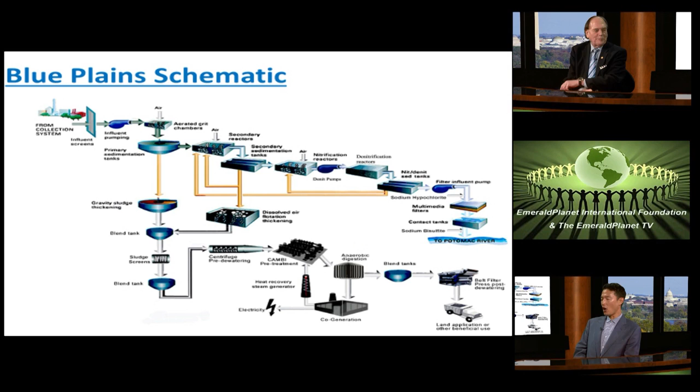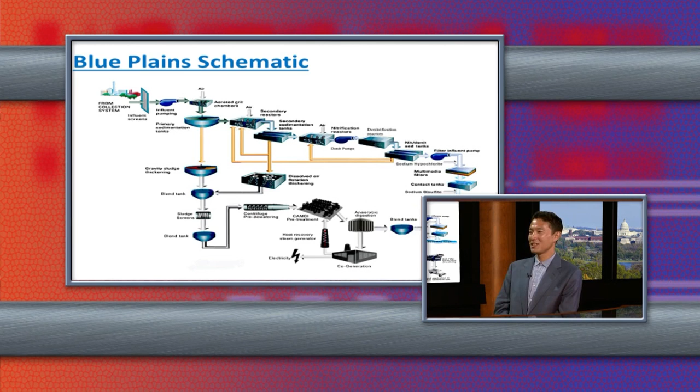If you take some muddy, murky water and put it into a bowl and just let it sit there for two hours, what's going to happen? It's all going to settle. That's all it is, it's a simple physical process.

We've been doing this primary treatment since the 30s. Whatever settles, we pump out the solids into solids processing, where the clear liquid overflows into the next process, and after that the biological treatment starts.

This is something our viewers will find interesting, because you've gone now from the mechanical to the biological process, where the aerobic and anaerobic bacteria now starts to do its work, correct? Yep, exactly.

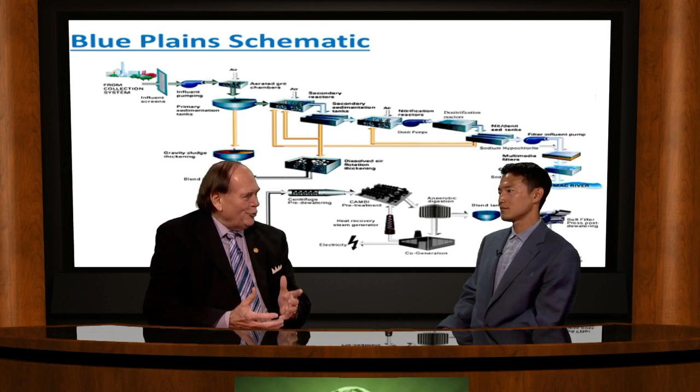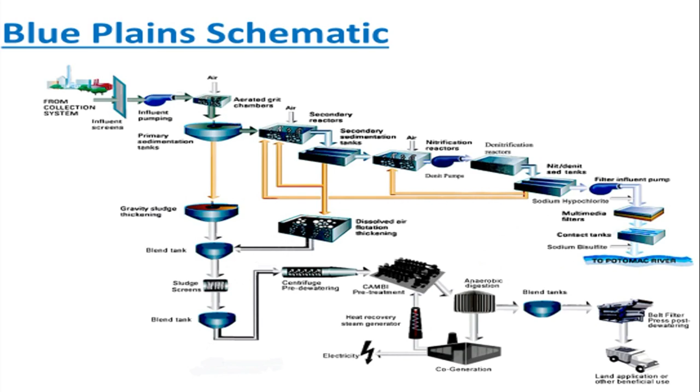It's way more cost effective to let the microbes, the tiny little microorganisms, do the work for us. There's trillions of them, and people have no idea - it's just a whole diverse ecosystem doing the work for us.

This is really a beautiful layout, and some of the new improvements you're doing since you've been there. So what are we seeing here in these colors - the blue, the green, yellow, and the pink?

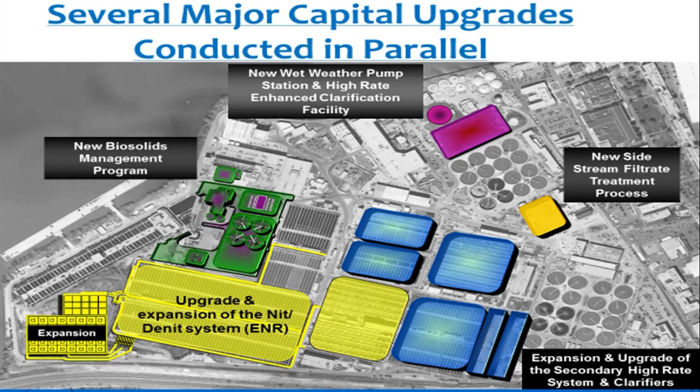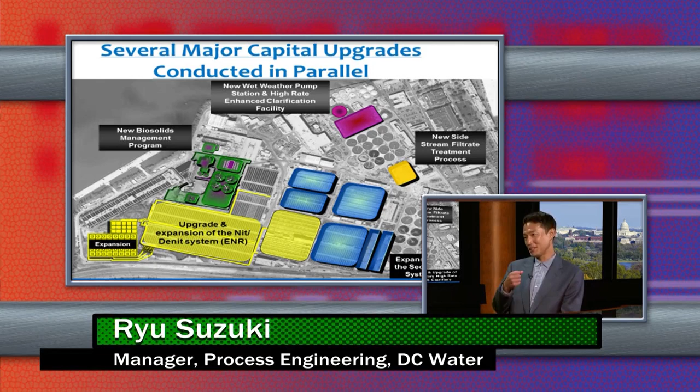The blue is the expansion of the secondary treatment, the biological system, where we add a lot of air and grow these beneficial bacteria that munch away at what we flush down the toilet. These bacteria are kind of like you and I - the three things they need are food, which is what we flush down the toilet, air, which we use a lot of energy to provide through these big blowers, and plenty of water. It's just providing more space and more upgraded equipment for them to do their work.

And then green and yellow? The yellow is the nutrient removal, which is also in order to comply with this very stringent limit that we have to expand our existing facility for.

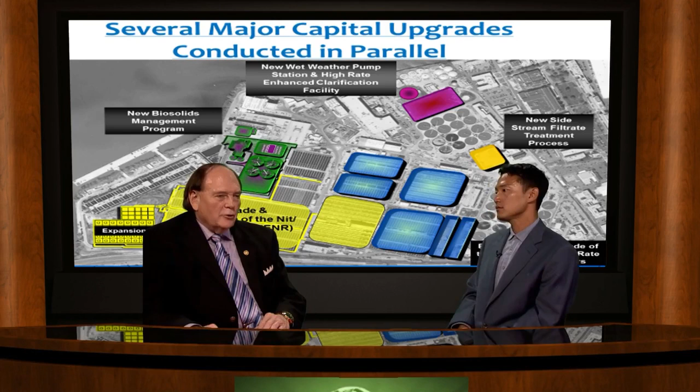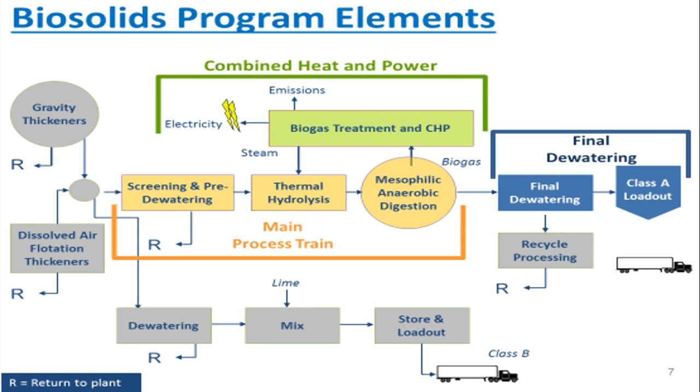And then the green - we'll talk about the biosolids later, but I know this is really your pride and joy, taking care of all this and turning it into useful products for DC Water itself, not just sending it out to the countryside but actually turning this into electricity, which is something we really want to spend time on. Yeah, absolutely, because that's very important.

If you're an engineer, this is all beautiful, these tanks and all that. So tell us about what we're seeing here. This is the thermal hydrolysis process, currently in the construction phase. This was part of the $400 million biosolids program that we completed a couple years ago.

We're going to get to all this later on, this hydrolysis. But looking at this, what do you see DC Water being in the next 5, 10, or 15 years as far as improving its processes and giving even better service to its ratepayers?

I think the biggest thing we're pushing for is because of some of the things you'll hear about later with the Clean Rivers Project, with the big tunnels - we've invested a tremendous amount of resource into it. So now, because the ratepayers are getting hit hard, we have to figure out how to optimize and make our entire organization more efficient.

When you look at this technology, it's just absolutely incredible, and we're going to get to that in just a little bit. This is Ryu Suzuki, professional engineer, manager of process engineering at DC Water. Water is life. Thank you for being with us as we create the Emerald Planet.

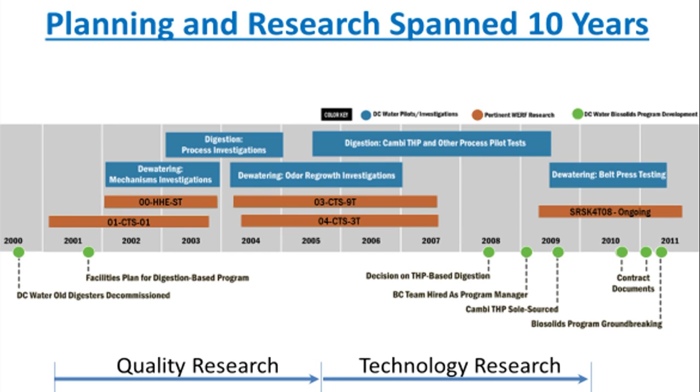And also, so you got the long-term cost as well as just to be able to create this good product. But don't the regulators have something to do with this? Isn't that really one of the principal drivers, to make sure the water is coming out the cleanest possible? On the liquid side, yes, we've put in enormous investment to clean the water itself, but the byproduct is the solids. And that was actually not driven by regulation.

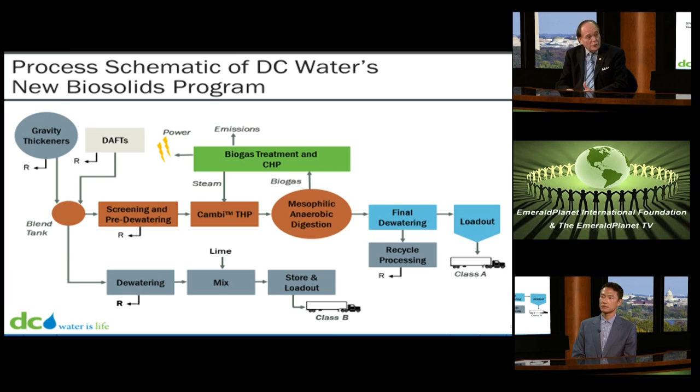That was all more based on looking at the long-term operational sustainability of DC Water. And that's really important - sustainability, resiliency, and also innovation, because you really scoured the whole world as far as finding the best technologies. So where did you actually get this particular technology that you brought into DC Water?

And now it's an incredible process. Yeah, so actually this thermal hydrolysis, it's been going on in Europe for some time. The company is originally from Norway. This particular system that we bought - now many other companies are getting into offering a similar product as well.

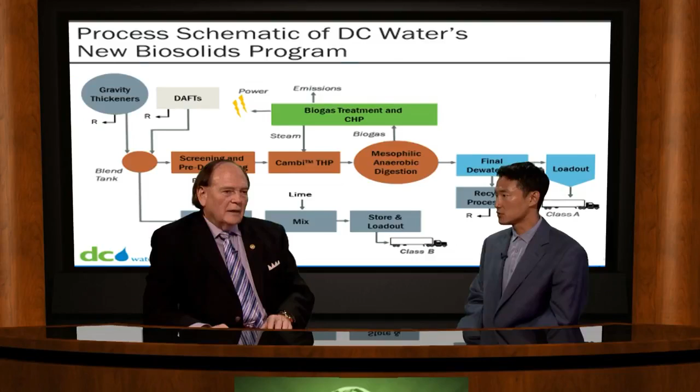So they've been doing it in Europe, and it seemed like the appropriate fit for DC Water as well. An appropriate fit we're looking at now. This is in large part because it took over a lot of extra space out of your footprint out there. But tell us what we're looking at in this green and purple space.

Yeah, so this is most of the solids treatment process that we're going to be talking about in a bit. What we do is we take this tremendous amount of organic material and convert it into clean biosolids as well as renewable energy.

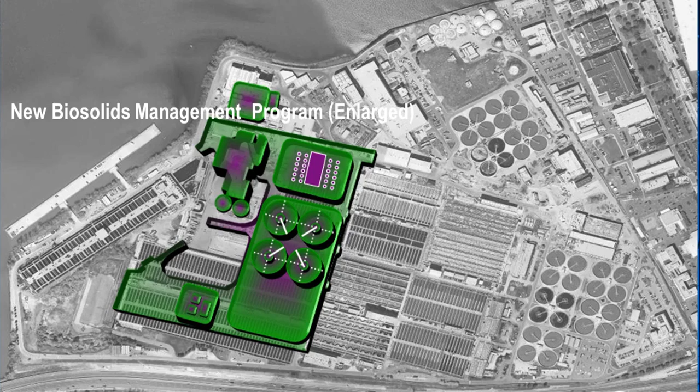And the whole thing about this is taking that - this is a waste. You've been shipping it, it's got to go by trucks. You're trying to find land out in the countryside where it can go, but stay away from estuaries, the creeks and the ponds and the rivers and all that. It seems like you've really come up with an excellent solution because you're producing all this right there and you use it right there and you turn it into a kilowatt.

Well, that too. But originally, one of the biggest advantages of having an anaerobic digestion system is before, what we did was all the solids that we added lime to it, raised the pH up to 12 to get this Class B. And we had to truck out about 60 trucks every day. So that was close to $19 million a year.

And the whole thing about it, just think about the amount of greenhouse gas emissions from all those trucks running on the highways. We certainly have enough cars and traffic on the highways around Washington, D.C. We don't need more, we need less.

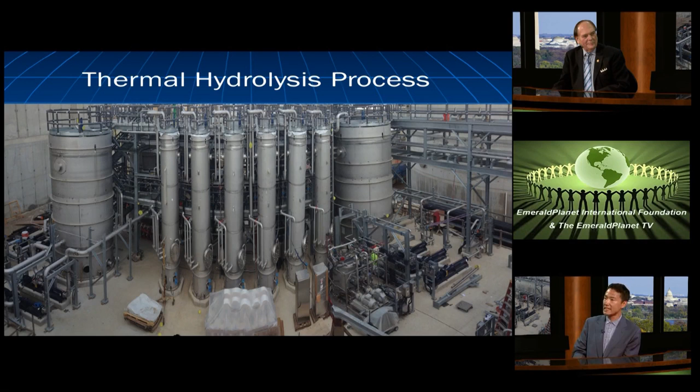Yeah, absolutely. But with this new thermal hydrolysis / anaerobic digestion, we're converting half that solids into biogas, which is a combination of methane and carbon dioxide. And it goes into another combined heat and power facility where it gets converted into electricity and heat to drive the thermal hydrolysis process, which is the steam. And pressure cook the sludge.

Yeah, and this is really very efficient what you're doing, and I find this absolutely amazing that maybe we waited so long to do this, but I guess the Europeans perfected this, particularly the Norwegians, and then we decided well, this is something we need to really try here. Was that part of that process?

Yeah, absolutely. And once again, you talked about how there's limited real estate in our facility. So we needed to be able to have a facility that could do all this treatment for us in a very small footprint. And that's what thermal hydrolysis allows us to do.

And this is some of the equipment you're using for this. What's this main process train? You and I were talking about this earlier. This is a beautiful layout. I like the color scheme and the scale and all that. But tell us, what does this really mean?

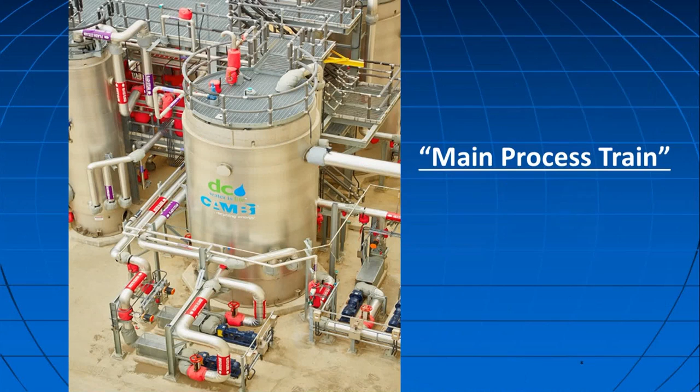So the main process train is basically the main process train of the solids processing. And what it is, it not only includes the thermal hydrolysis and anaerobic digestion, but all the other auxiliary systems that we need to be able to make this system work.

Now we have this here. This is a beautiful looking piece of equipment. Of course, if you like engineering and technology, this is beautiful. Other people would say something different. But the process of this, what would have been there before? Would it have been nothing, or would it have been much simpler and much less complex than what we're looking at right now?

So just for the people looking at this, how have we morphed, we've gone to the next level as far as processing? Anaerobic digestion, if you could think of it, is this massive cow stomach that takes organic material and stabilizes the solids and converts it into biogas.

But say if you have raw food, which is raw solids, it takes a lot of space to be able to break it down fully, to get the full reduction of solids and let the biology do the work. But if you could imagine, going back to the bean, if you have the cooked beans, it takes way less stomach volume to do the same amount of treatment, because it becomes way more biodegradable by cooking this material.

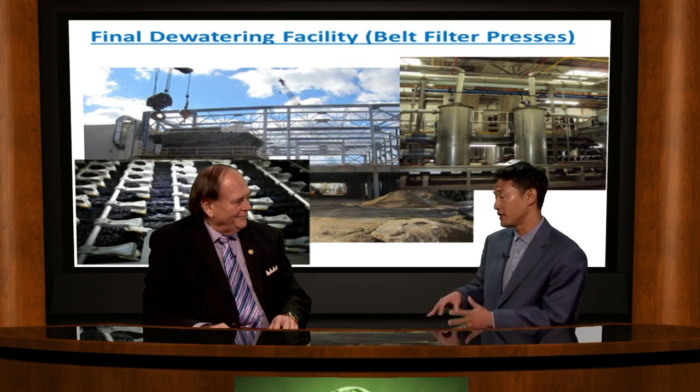And plus, another major advantage is because we're cooking it at such a high pressure and temperature, you're sterilizing the solids. These solids do have a lot of pathogens in them, but at this high temperature, high pressure, you're just annihilating it all. You're sterilizing and killing all that off.

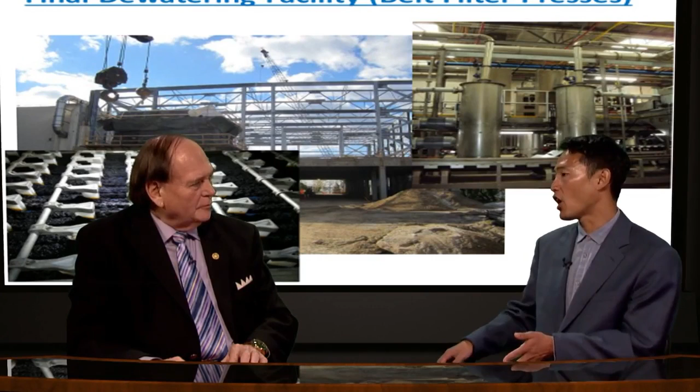Now, dewatering, why is that so important? We still have to haul out the material from our site to different gardens and farms for land application. You want it to be as dry as possible because the more water you have, water is very heavy. Also, those solids are easier to get into the streams, ponds, and surface water if it's really wet versus being dry and spread across the top of the soil.

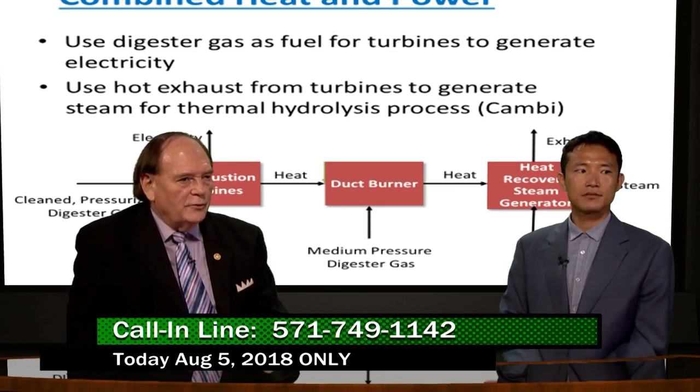Combined heat and power, this is something you referred to briefly before, but it's something that's really new. So tell us why this is so important as far as DC Water is concerned, but also the ratepayers and the environment, because that's the ultimate goal. How does this really help?

So in the digestion process, we generate all this biogas that has about 65% methane, or natural gas. First we clean it up, then compress it to a very high pressure, and then combust it through combustion turbines to generate electricity. We're the largest energy user in all of DC area, and this meets about a third of our energy need, which is enough electricity to power about 8,000 homes typically.

8,000 homes, yeah, all from what we flush down the toilet. Oh my gosh. There's a lot of energy value in it. Yeah, absolutely, and that's what we're using it for. This is really just a schematic, similar to what we were looking at earlier as far as the layout of this whole facility.

Looking at the future, what do you see as far as this thermal hydrolysis process and where we're going over the next 5, 10, or 15 years? Do we go from a third to half, two-thirds, three-quarters? Are you going to generate your own electricity and steam, or what do you see realistically for the future?

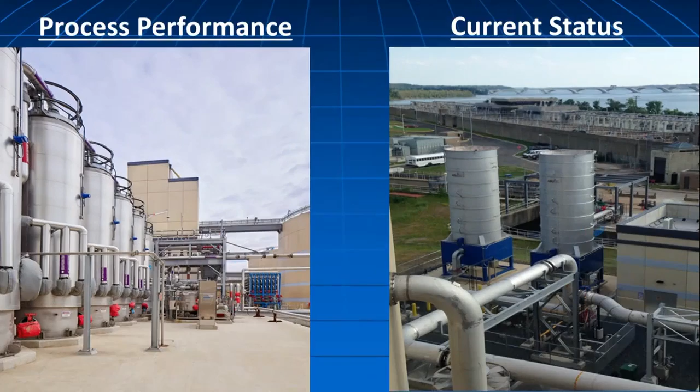For the near future, I think at least mine and our team's main goal is to really maintain and optimize the system, because there's a lot of moving parts, and our ratepayers have made a tremendous amount of investment. So it's our duty to make sure this system is sustainable and we're able to keep running it. Process performance, current status, all of this is to make it that much better. And then if you can expand it gradually over time, you want to do that, but for now our main focus is to maintain what we have.

That's fantastic. Ryu Suzuki, professional engineer, manager of process engineering, DC Water, Water is Life. This is just incredible to take this tour through, we'll call it a campus. It's a beautiful location, it's a beautiful site. Thank you as we create the Emerald Planet.

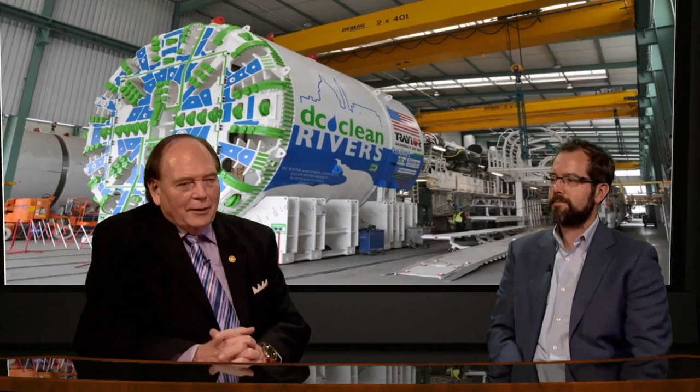But this looks very innocuous. It's just sitting there. But this thing is a monster that we're looking at right now. Now we're moving into this big dig, right? I love to call this, and I've heard that. I don't think it's original to me. But tell us about the big dig and what are we actually looking at in the size of this thing?

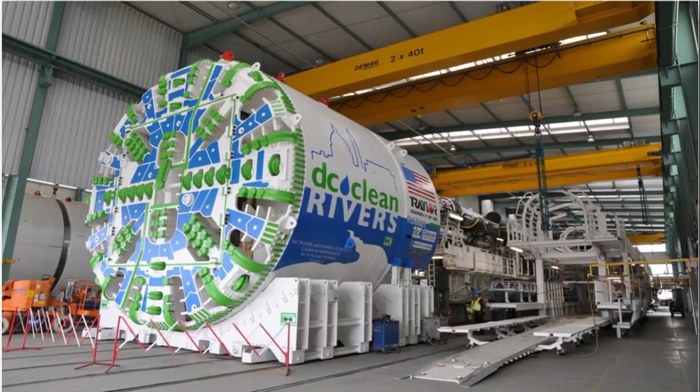Absolutely. So we're looking at one of our tunnel boring machines. This is one of the machines cutting the tunnels we're constructing underneath the district as we speak. We're building 18 miles of deep tunnels to intercept combined sewer overflow and capture that flow and keep it out of our waterways. The tunnel boring machine is typically about 450 feet long. They're assembled or constructed in Germany and then shipped over. At least this machine was built in Germany and shipped over in about 17 pieces. It cuts a 23-foot diameter tunnel.

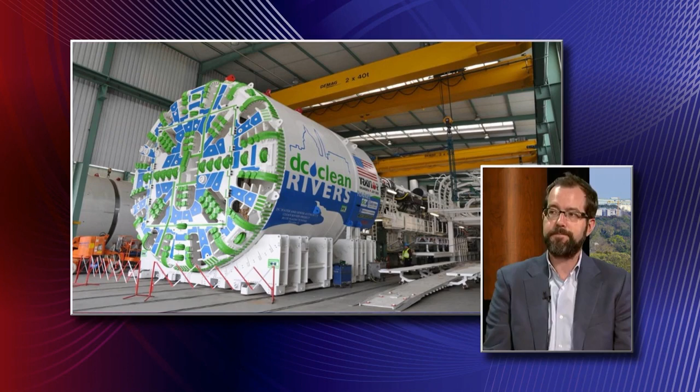That's so incredible. It's a massive, that's hard massive to machine. Yeah. And you look at this, and it's not that overwhelming as far as looking at it, but something that can cut 23 feet, I mean, that's huge. I can tell you, as someone who's been down in the tunnel, or also someone who stood in front of the cutter head of these machines, it is absolutely staggering, just the enormity of the machine itself.

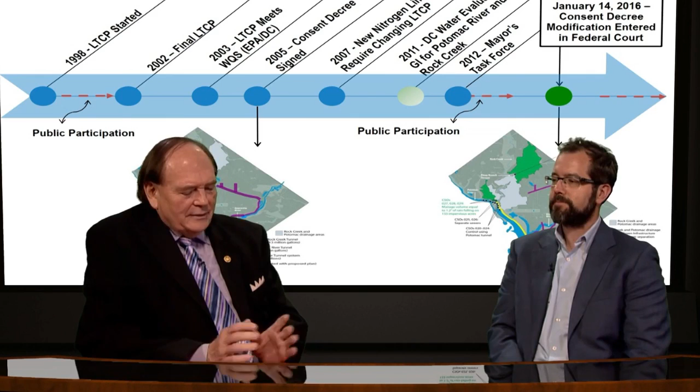It's really just massive. Now, looking at this, there's a lot of regulations involved in this. We wanted to improve the rivers here, but again, going to the Chesapeake Bay, out to the Atlantic Ocean.

I mean, there's a lot of people that are very concerned about the water coming into and then going out of Washington, D.C. in this whole region. But it's a long timeline. If you look at the number of years involved in this, it's incredible.

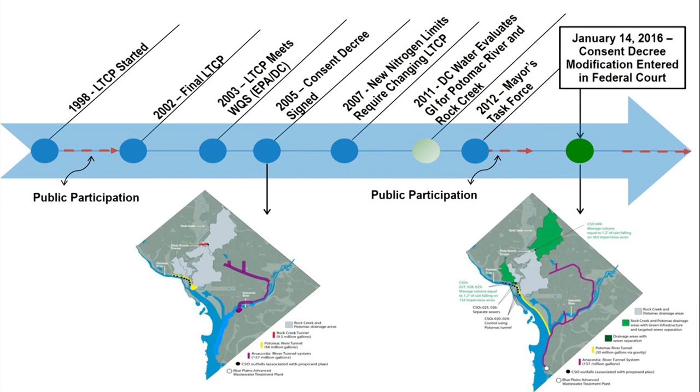That's right. So we've been working on this project really since the late 90s. Basically, the district and DC Water were found to be not compliant with water standards because of combined sewer overflows going into the creeks and rivers. So by 2005, there was a consent decree and a long-term control plan, which is basically the mechanism for meeting water quality standards. And the way we're doing that is through these deep tunnels, as well as green infrastructure, which we'll talk about a little bit more later.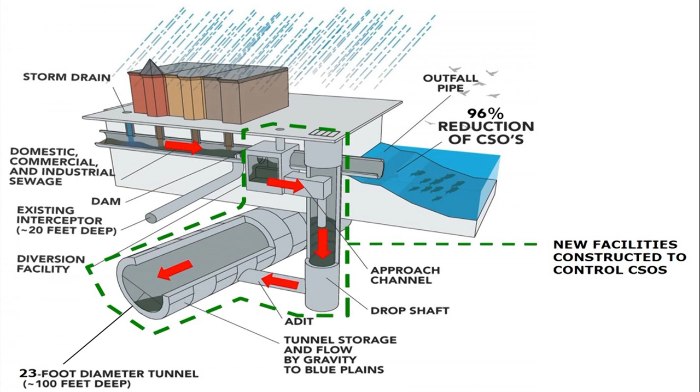Yeah, and we have the schematic. Just tell us what we're actually looking at here and why this is so different, maybe even radical from what was going on before. So in the schematic, you can see the old sewer system and the old outfall that goes right into the river. It's showing a combined sewer. The middle third of the district is actually a combined sewer system, so it's one pipe for both the sanitary flow and stormwater flow coming off the streets. Which is very inefficient. It was actually high tech about 120, 125 years ago, but now no longer. That's right, it replaced open canals and cesspools behind people's homes. But we know better now, and obviously we don't want to combine those two, the sanitary and the stormwater.

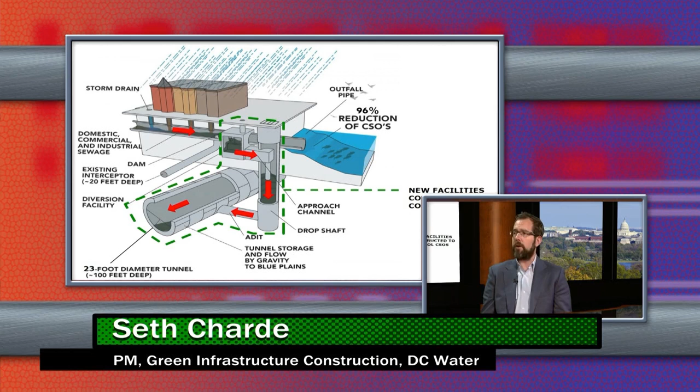And the challenge with these old systems is that when it rains too much, there's not enough volume inside the pipe, and they actually overflow by design into our creeks and rivers. So looking at this schematic, what it's showing is essentially a diversion structure and then a new tunnel that we're constructing. That diversion structure pulls the water that would have otherwise gone into our river into the diversion structure and directs it down into the tunnel, where we can convey it down to Blue Plains to clean it up. Yeah, and that's the main facility.

And this is a bird's eye view of all this. Now we're looking at this massive hole that's been opened up in the ground. You're going through neighborhoods, and of course this is very disruptive, not only to this neighborhood, but the traffic and the whole city. So how do you lessen some of this, but yet have people understand this is critically important for everyone's future?

Right, right. So this particular project is the First Street project. And we actually advanced this construction. This was originally supposed to take place in a few years. The neighborhood has been historically receiving flooding during high rainfall, and it's a result of undersized pipes that are also part of the combined sewer system. So we advanced this part of the project, and the First Street project was in particular a little tighter than some of the other projects, or other aspects of the tunnel project that we've been constructing.

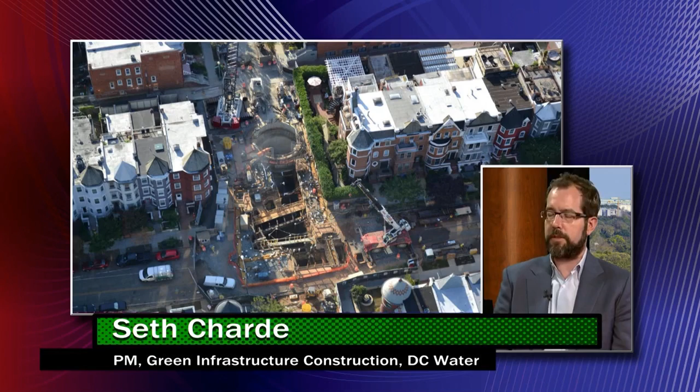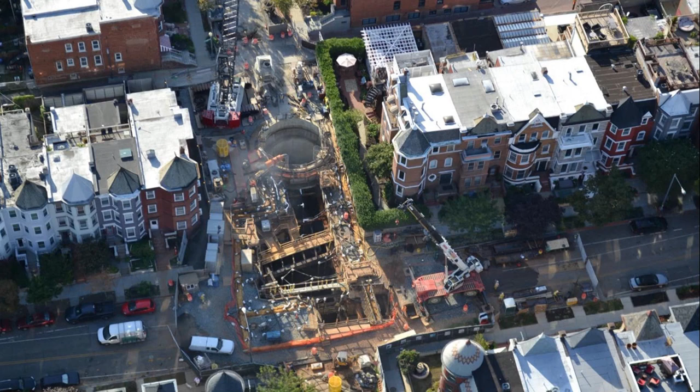Yeah, and we're going back to this massive unit, let's see if we can get back to this. This thing has got to go down through here. Is that what I understand, or how does this monster actually get into this? Okay, so what we're looking at at First Street is actually a drop shaft, and then some of the work to build the diversion structure. The tunnel itself and the tunnel boring machine was dropped north of this point in another drop shaft where we had a little more room to work. The staging areas for dropping the tunnel boring machine are a little bit bigger than what you see on the First Street site.

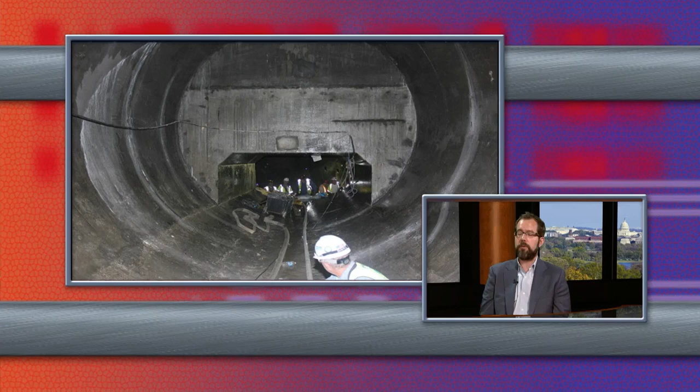That's right. So these tunnels are being dug anywhere from 100 to 150 feet below ground. Again, it cuts a 23-foot wide interior diameter tunnel, which is bigger than the metro tunnels. And we're building 18 miles of tunnel, 13 on the Anacostia Blue Plains side, and then another 5 on the Potomac side. Yeah, this is just amazing.

Tell us a little bit about what we're seeing here, not to be too technical, but just how all this works together. You're doing, would you say 100, 150 feet below the surface? Below grade, that's right. That's incredible.

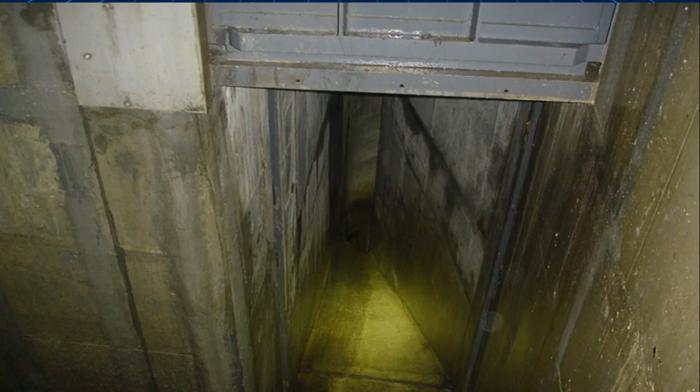Part of the challenge is the sewer system is not 150 feet below grade, so we have to convey that flow down to the tunnel. We need to do it in a way that reduces the amount of air that's in the water, because air takes up space. So what we're seeing is part of the diversion chamber or diversion structure, which directs the water from the existing sewer and brings it down to the bottom of the shaft and into the tunnel, while reducing the amount of air in that flow. This is all part of that process we're looking at here.

That's right, a similar aspect. Now looking at this, is this all precast concrete? Is it poured on site? How does all this work? Because we get a lot of questions. That's why we've been trying to get you on the program for so long about how this thing really works. People see it, but they don't know exactly what it is.

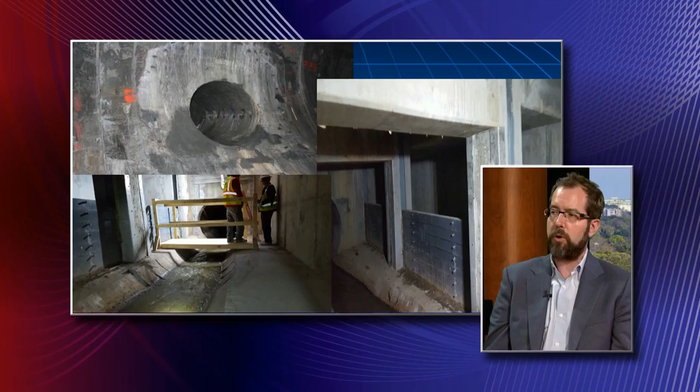The drop shafts and diversion structures, most of those are cast in place, cast on site. The tunnel segments are all precast, so it's 7 segments for each ring. Those are precast off-site, not too far from here, but they're trucked in, and then we bring those out to the face of the tunnel boring machine on a little train. There's an arm at the end, a robotic arm, that picks up those segments, puts them in place, and then the sandhogs, the crews that operate the machine, get up and bolt those segments into place to finish one ring.

This is incredible. Now, this is a composite of 3 different photographs, so we're looking at multiple parts here, and as we say, this really is moving parts. So tell us a little bit about this.

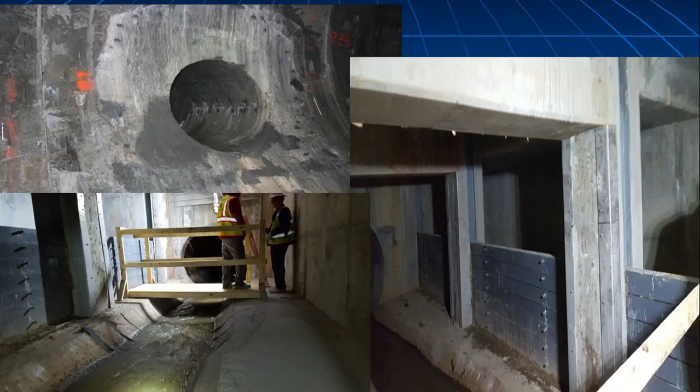Sure, so the smaller circular hole you see there, that's an adit, and it's basically a connection between one of the existing sewers and the tunnel. The other component is an existing sewer with a weir, as we're seeing the inside of the diversion structure. When we have high flow conditions, the weir allows that flow to pass over it, get into the diversion structure, and then make its way down into the tunnel. Otherwise, the flow would stay within the channel of the existing sewer system and go down to Blue Plains as it would in dry flow.

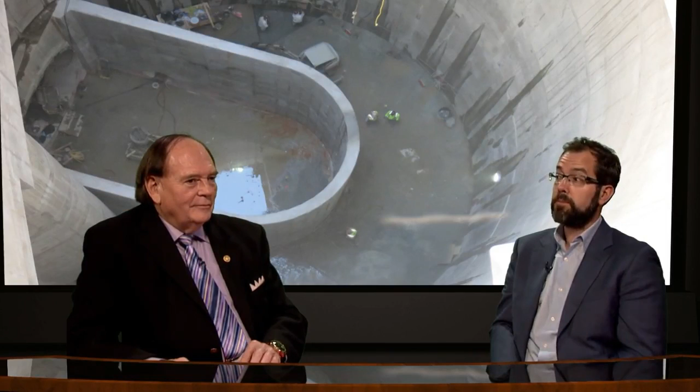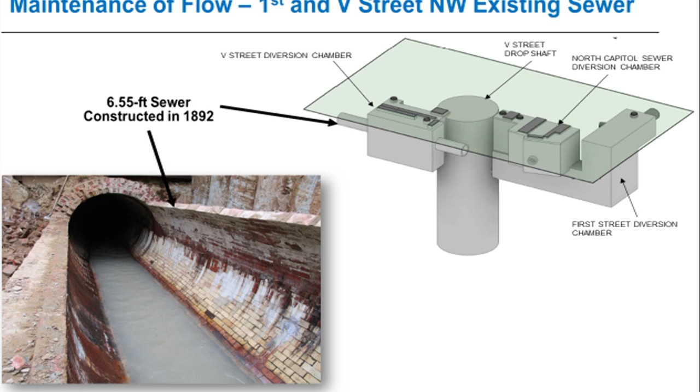So all this money the ratepayers are putting into this, and the bondholders and all that, they're already seeing benefit from this, correct? Absolutely. So the first segment of the tunnel has been constructed, that's the Blue Plains segment, and that was put into operation in March of this year, March 20th. Since March, within 4 months, we've kept over 2 billion gallons of combined sewer. 2 billion gallons with a B. That's right, that is absolutely incredible.

And I understand there's just thousands of tons of trash that's been siphoned off as well. About 130 tons of trash. That's just incredible. And what we're looking at here, this is something from 1892, one of these old chambers, and then we're doing all this new work around it. We're just going to put some of this in here.

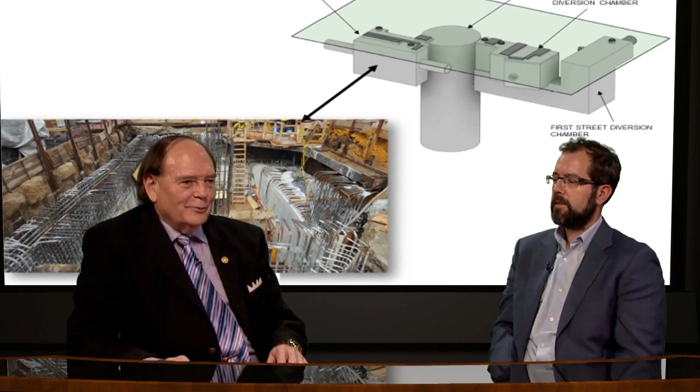But the last question really is the big dig. What do you see as the advantages of that expanding and really helping the city, the environment, the Chesapeake Bay, the Atlantic Ocean, and the ratepayers over the next 5, 10, 15 years? Well, it really comes back to fishable, swimmable rivers, and that's key for bay restoration. Absolutely. So meeting water quality standards, having safe, fishable, swimmable rivers, and obviously bay restoration and the economic engine that the bay is for the region.

So what is your hope as a professional doing all of this? We're going to talk about green infrastructure and all that, but as far as the big dig, what is your hope for this, and what are you actually seeing? Well, the tunnel is engineered to have a 100-year design life, but given the quality of the construction, the quality of the tunnel, I think we're going to see more of a 200 or 300-year design life.

That's absolutely incredible. And we go back to, we saw those tunnels going back to the 1800s, and they've lasted. It's new technology, and it's new life as far as the environment.

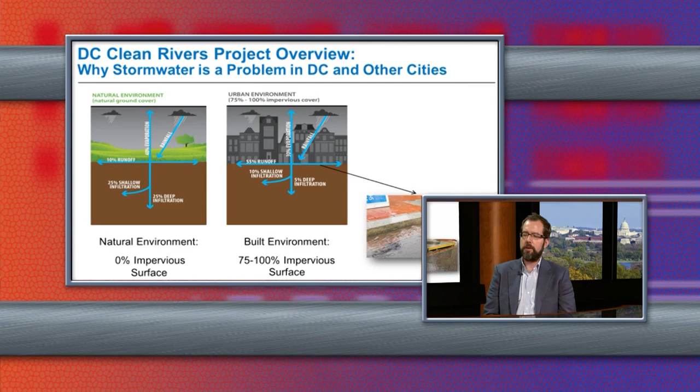Well, it really comes down to triple bottom line, right? The gray infrastructure, the big tunnels, they're incredibly effective, but they're also 150 feet below grade, out of sight, out of mind. We wanted to introduce solutions that also carried other benefits, right? So offered the opportunity for local green jobs, or greening up neighborhoods and helping to promote neighborhood redevelopment. And so we can really see that with green infrastructure.

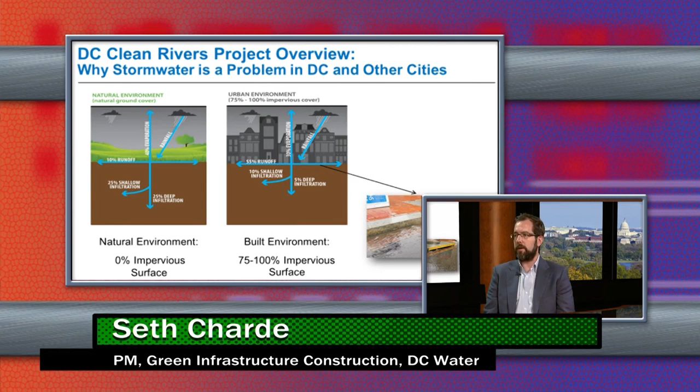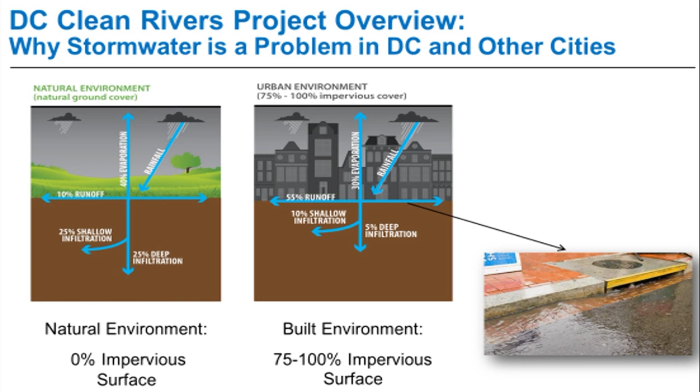Yeah, and the whole thing about this green infrastructure, my understanding is we're already above 35, maybe 37% canopy, meaning trees, all over the city. And of course, we have a lot of grass. Rock Creek Park is a giant carbon sink, as we know. So it's very important that we have this to complement all this high technology you have. But let's go through pervious, impervious, and then we're going to lead right into what you're actually doing as far as this green infrastructure, and we'll see some of that.

Sure. So despite having all these trees and despite having Rock Creek Park, much of the district is impervious surface, that's roadways, rooftops, sidewalks, parking lots. In a pre-development scenario, when it rains, the water soaks into the ground, you don't have very much runoff at the surface, you have more evapotranspiration. In a post-development situation, especially in an urban area where you may have up to 100% impervious surface, that water has nowhere to go except to run off on the surface, go into our sewers, go into our creeks and rivers. So you see a huge spike in volume, and you don't see that groundwater infiltration.

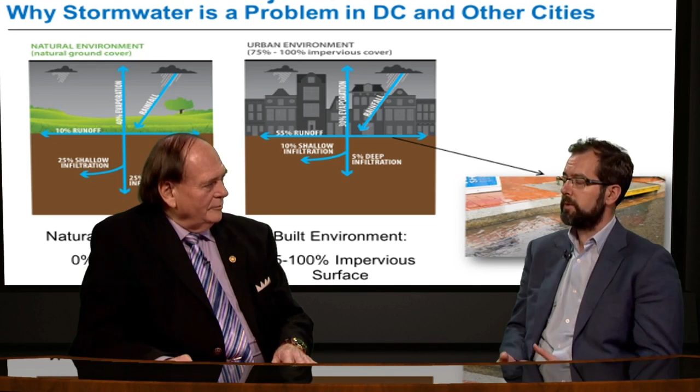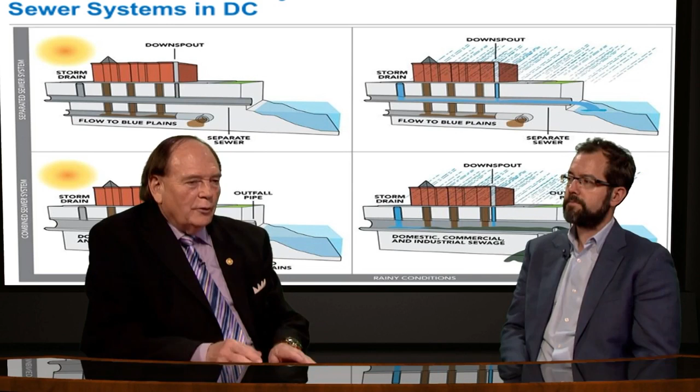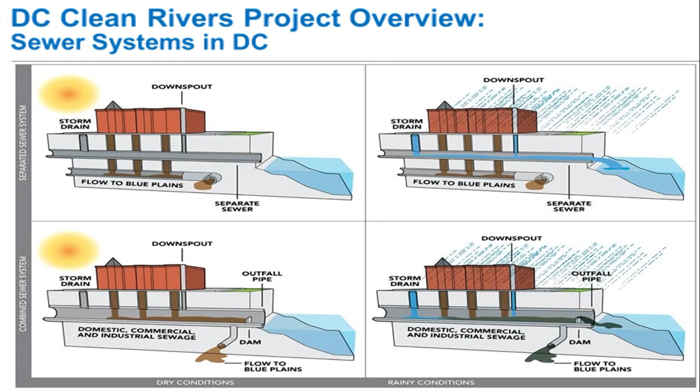And so what green infrastructure does is really try to mimic the pre-development conditions that were there before the city was constructed. Yeah, and looking at this as far as the sewer systems, we got this overview and these 4 different drawings here. How does this really relate to Washington, D.C., the ratepayers, but also downstream, no pun intended, as far as the quality of water and what's ending up in the Chesapeake Bay and then, of course, into the Atlantic Ocean?

So the district, like many older municipalities in the United States, has this combined sewer system, and this is a legacy system. In dry conditions, flow stays in the pipe and goes down to Blue Plains where it's treated and cleaned up. But when we have too much rain, there isn't enough volume in that single pipe because it's a mix of sanitary and storm flow, and it overflows by design into the creeks and rivers. Introducing raw sewage into our creeks and rivers isn't healthy for our immediate community or any downstream communities.

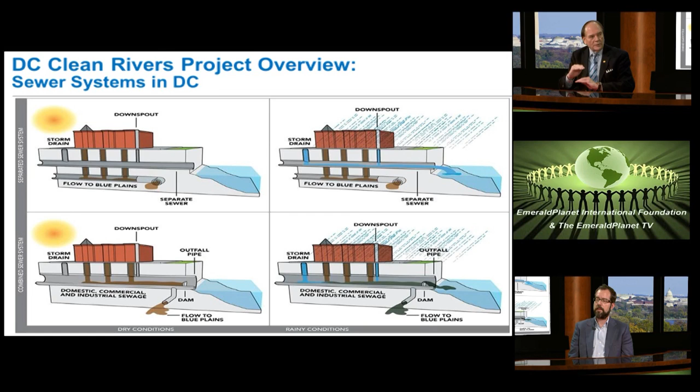The whole thing about this—I'm going to stop at this diagram right now, because people don't realize the damage from the increase in rainfall. Scientists are now saying we have a margin of maybe a third more volume, a third more violence coming because of these cloud bombs and all this change happening because of climate change. It's destroying the riverbanks and doing real damage to the environment.

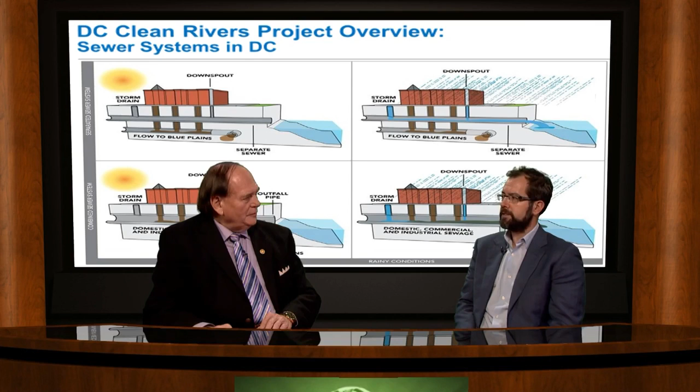That's right, these huge spikes in flow are really unprecedented. You're seeing scouring of the stream banks that's picking up a lot of sediment, transporting it through the aquatic systems, destroying aquatic habitats, polluting the rivers and the bays. So by holding that flow back, keeping it out of the creeks and rivers using green infrastructure, we can really try to reduce some of that sediment and pollution.

But how does that then, no pun intended, flow right into what you're doing as far as your green infrastructure? How do these two fit together? Because you've got the huge technology, right, and then you've got just beautiful streets.

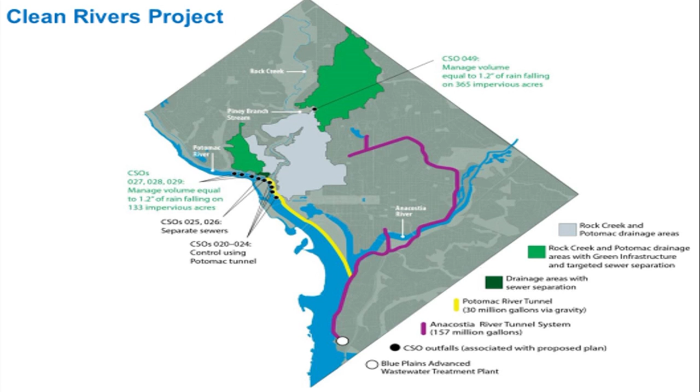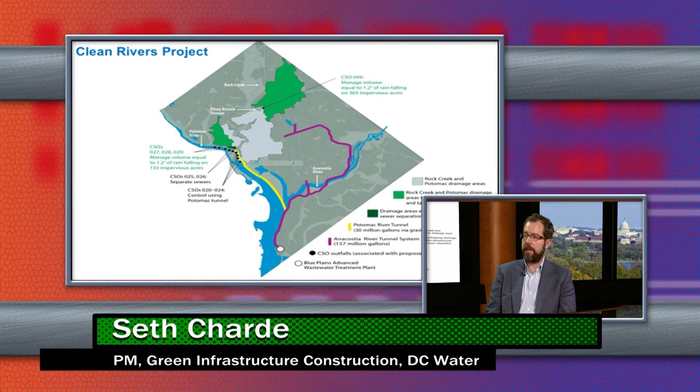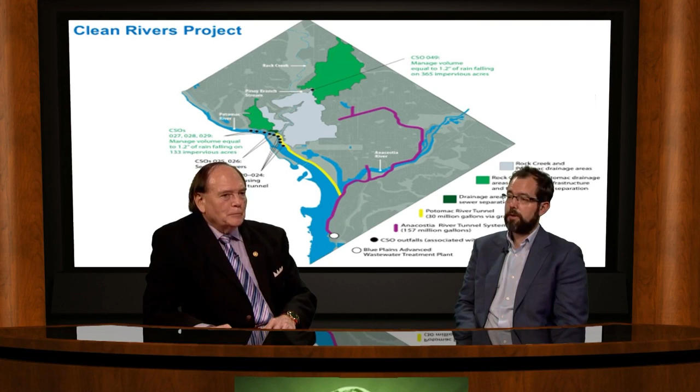So the map we're looking at shows the tunnel system as well as the target areas for green infrastructure. On the right side of the map, that's the Anacostia tunnel system, and on the left side, that's the Potomac tunnel system. We looked at the volume of flow and the timing of implementation, and made a decision about pursuing the tunnel-only option on the Anacostia side. Looking at the flows and existing conditions, green infrastructure made a lot of sense for the Rock Creek portion, and also the northern Potomac portion of the watershed.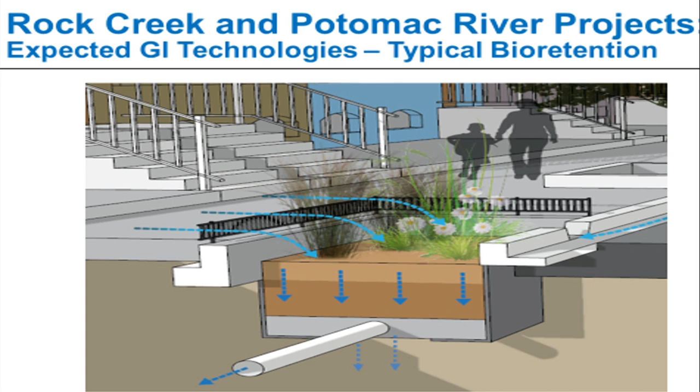So bioretention is one of the suite of green infrastructure practices that we're using. Essentially, we are mimicking natural processes. It's constructed by excavating out about 4 or 5 feet, backfilling with gravel which creates a storage area for holding water, and then on top of that you put a very sandy planting soil, and plant out the top. So from the surface it looks like a garden—sometimes these are called rain gardens. But from a functionality perspective, it can bring in and store a lot of water coming off our streets and rooftops, and it infiltrates that water into the ground or slowly releases it back into the sewer system after the storm has passed.

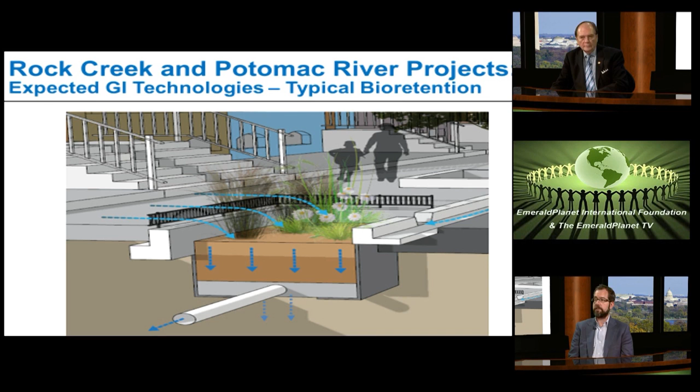Now, I've heard over the last couple of decades that the inflow to the Potomac River has been about 4% less per year—I haven't verified that. But with this, now we're actually capturing that, and we're increasing the water table throughout the district. Is that going to help with the flow, both for the Potomac and also for the Anacostia?

So we're not anticipating any increase in ground flow. In fact, we are constructing all of our facilities connected to the combined sewer system, using a flow restriction device to slowly release that water off. Where we can infiltrate, we will, but that's not necessary to the functionality of the system.

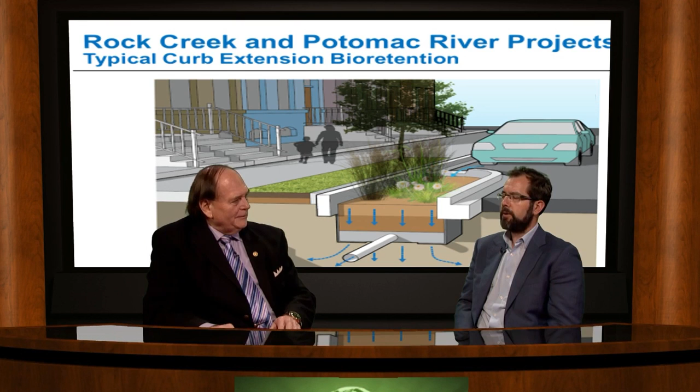John from Fairfax is calling in about this bioretention. He's interested about why you're using plants and then the gravel, the sand, but it looks like there's pipe in here. What is this pipe doing, and does that go to the point where you're actually putting this into this new system? Right, so in the facilities we're constructing, we always have an underdrain, and we use a flow restriction device, connecting that back into the combined sewer system.

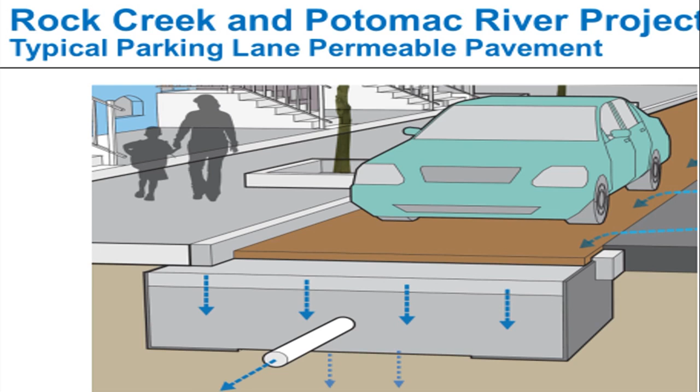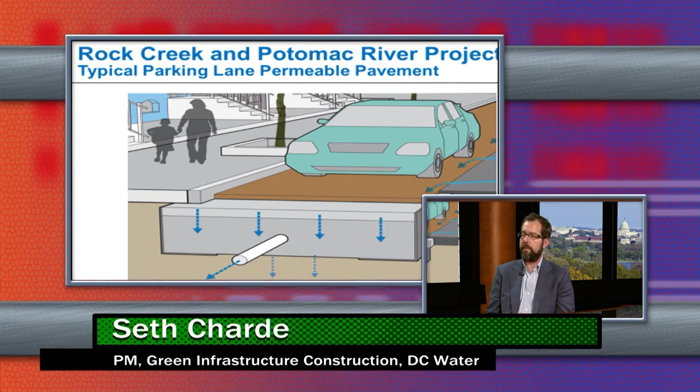So imagine like a storage tank with a very small hole. It lets out a very small amount of water at a single point in time, so we can fill up the bioretention. The storm passes, the capacity in the pipe in the street empties out, and then we can slowly release back in after that storm has passed. The plants also help to filter and clean the water as well, so it gets cleaned up within the bioretention before it goes down into that aggregate storage bed.

If John looks at this, you can see exactly what you're talking about, where the little tiny hole coming out through this pipe is slowly releasing this.

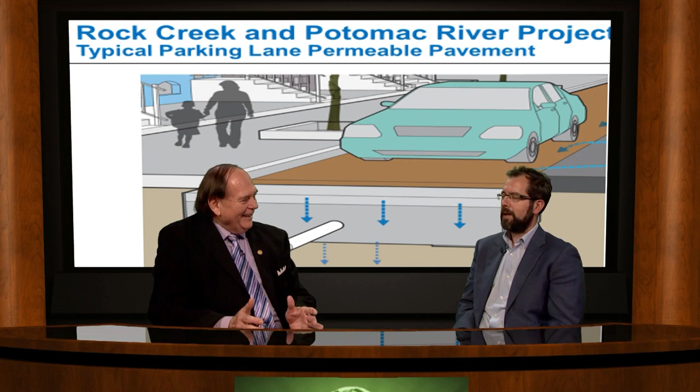But going to this permeable pavement, what is permeable pavement? We're starting to see this all over Washington, D.C. I do a lot of walking, and as I walk around the city, I'm seeing more and more of this. Right, so permeable pavement functions very similarly to bioretention. The main difference is, obviously, there are no plants. So from the surface, it looks like any pavement, like a cobble or a concrete or an asphalt.

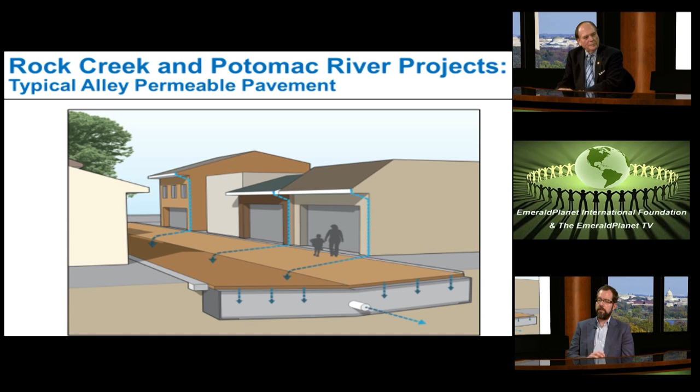But again, we excavate out, we put down a gravel storage base, and then a little bit of a smaller gravel on top of that as a setting bed. And then we either place precast pavers or bricks, or we do a porous concrete or a pervious asphalt on top. The porous surface allows rainwater to go through that surface down into the storage base, where it's held for a period of time and either infiltrated into the ground or released back into the sewer system.

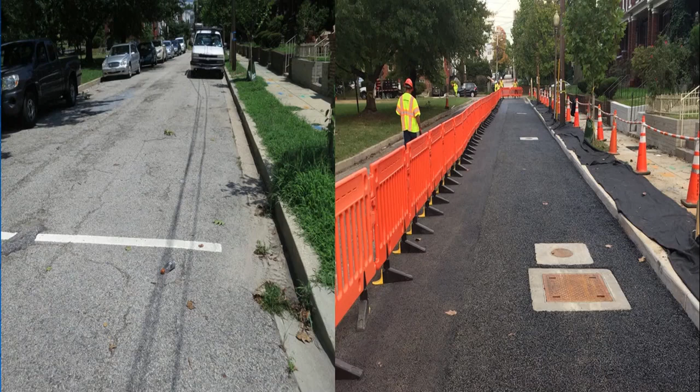John, our viewers can see this. You have one that's impermeable, asphalt, and then you look at the pavers here. When you're walking down the streets - because I have to walk the dogs, so I'm out there when it's really downpouring - you can actually tell the difference going alleyway to alleyway or street to street. Right, in a rainstorm you might walk down one of these alleys, and the noticeable difference is that you don't see water flowing through them. It goes immediately down into the pavement surface. These pavement surfaces typically have an infiltration rate of around 60 inches per hour. How much? 60 inches per hour. Oh my goodness, that's absolutely incredible.

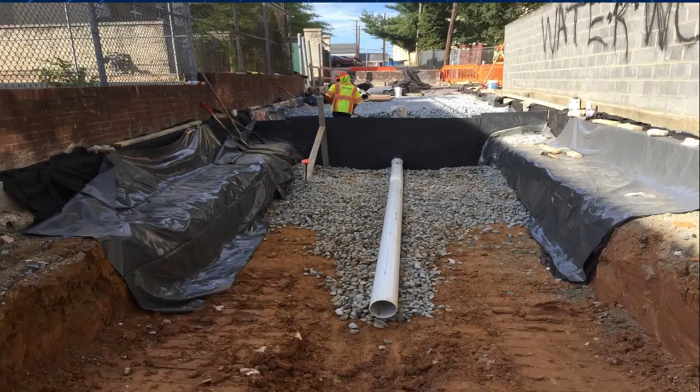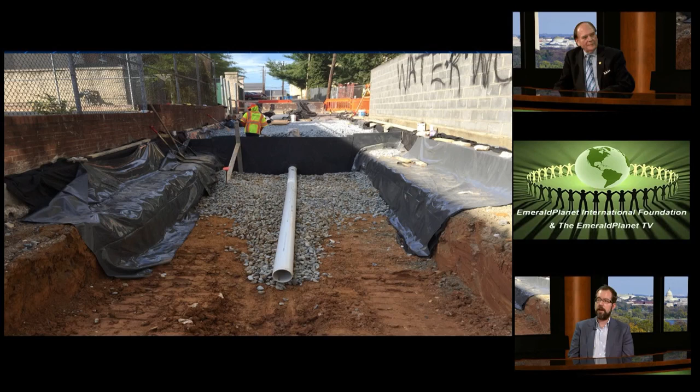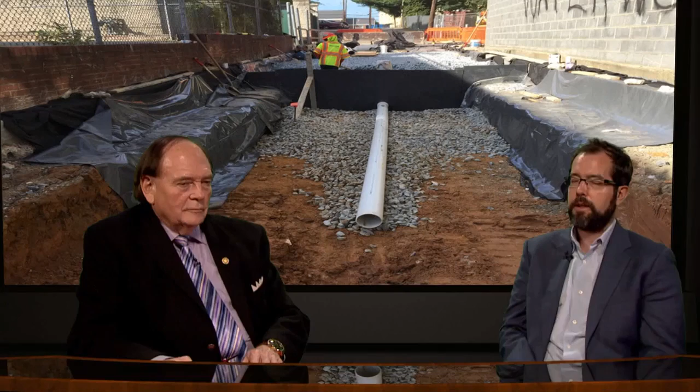And now we're looking at what this really looks like. You've been describing this for us, so let's go over this - we're running out of time, but so John and many others will know exactly what we're talking about. Right, so this picture is showing one of our permeable pavement facilities being constructed in the alleyway. What's nice about this picture is you see a lot of the elements - the excavation, the underdrain, a check dam which helps us manage the slope and manage the water within the facility on a slope, and then the various layers of aggregate behind it, and some of the clean-out structures. Of course, when this was ready to be paved, we just put a pavement surface across the top.

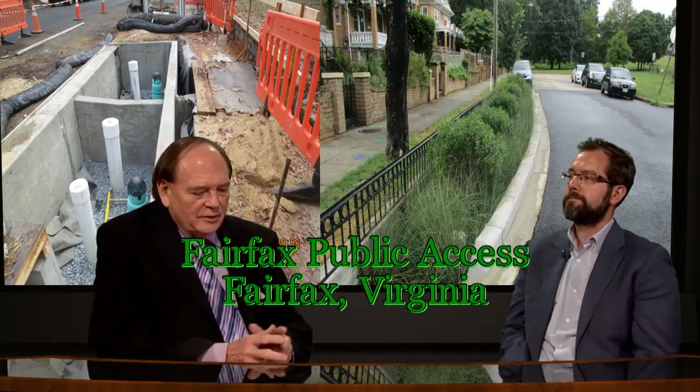That's incredible. This is Seth Charde, the program manager, infrastructure and construction, as we create the Emerald Planet.